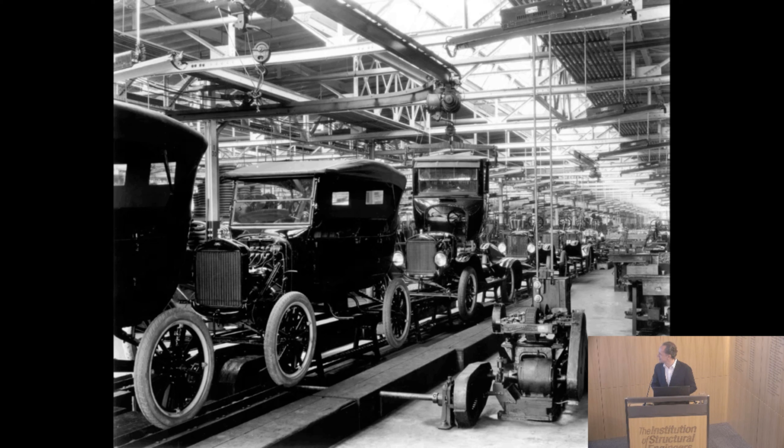So that is lovely if you can do it, but we have a much more tricky challenge, I would say. But at the same time, we shouldn't fall into the trap of saying, let's just do the very basic. We really should be pushing things.

So a quote from one of my favorite authors. I wanted to talk about how we use technology and the fact that the future is maybe already here, just not evenly distributed.

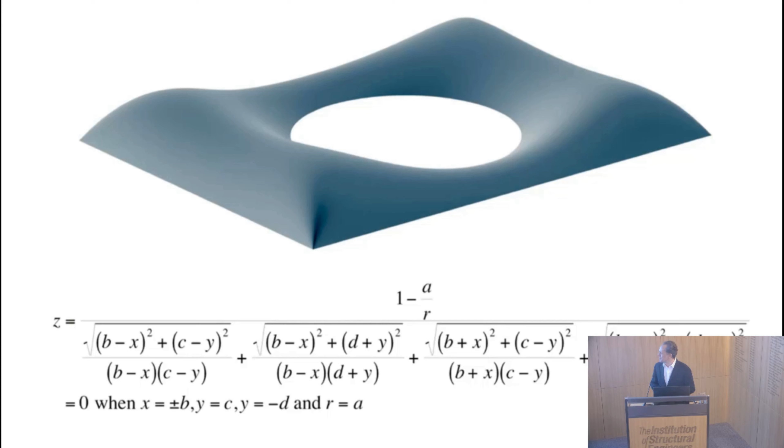Work on computation at Foster's precedes me. This is amazing work done by our colleagues at Buro Happold and at Bath University. Some very elegant integration of geometry and structural optimization and buildability. So these tools have been around for a very long time, although they've been very specialized.

This is one of the first projects I worked on. This is the refurbishment of Dresden Railway Station. This was an interesting example where we were working with Happold. They were doing a great job, but the cycle time was still too long.

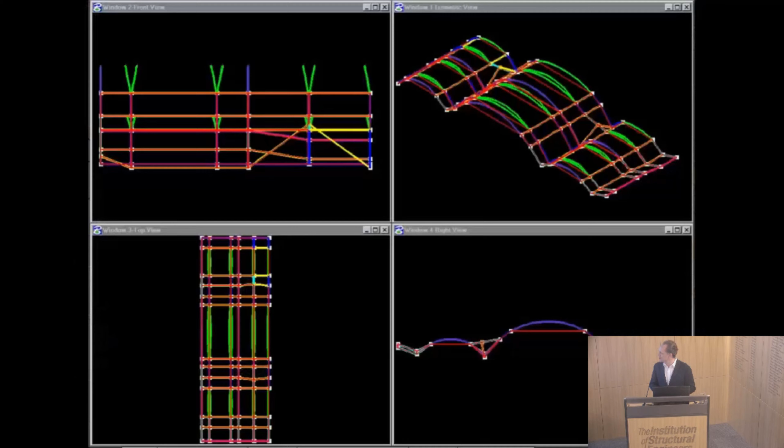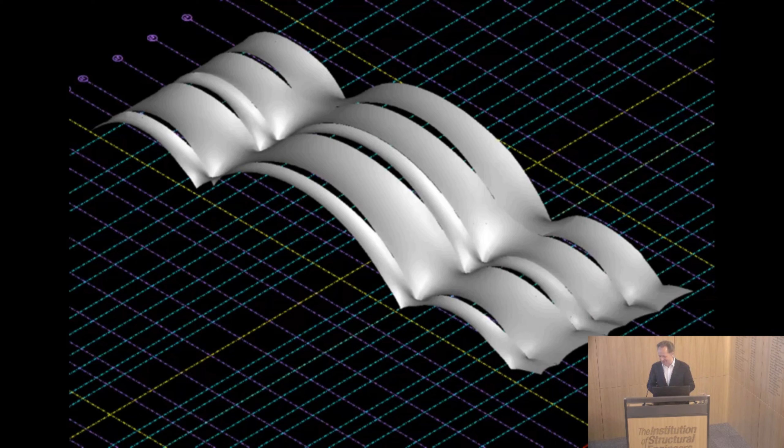So we actually wrote a custom integration between MicroStation and a DOS-based form-finding piece of software called MCM. And we could go round the loop in maybe a half-day cycle rather than a one-week cycle. So, if you never have to reverse engineer a file format, you'll be very fortunate. But it allowed us to do certain things that were very powerful at the time.

With Swiss Re, again, a very odd example of computational design. The tools we were using were Excel. What we were producing was very crude, but it allowed us to do things that at the time were very hard to do.

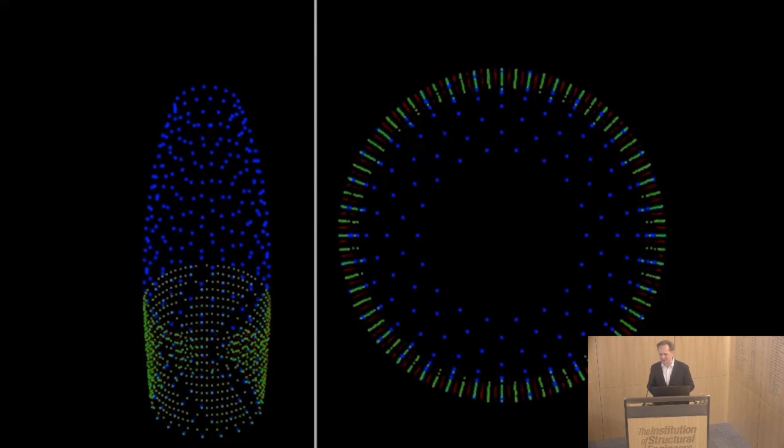Integration time was very limited. You couldn't even exchange data properly between MicroStation and AutoCAD, which is why we had this very simple geometric definition. But it allowed us to essentially mass customize and create a building that I think still stands the test of time.

This is Chesa Futura. This is a wooden chalet we did in Switzerland about 15 years ago now. Again, a very challenging site. You could only build on the site half the year because otherwise it was snowbound.

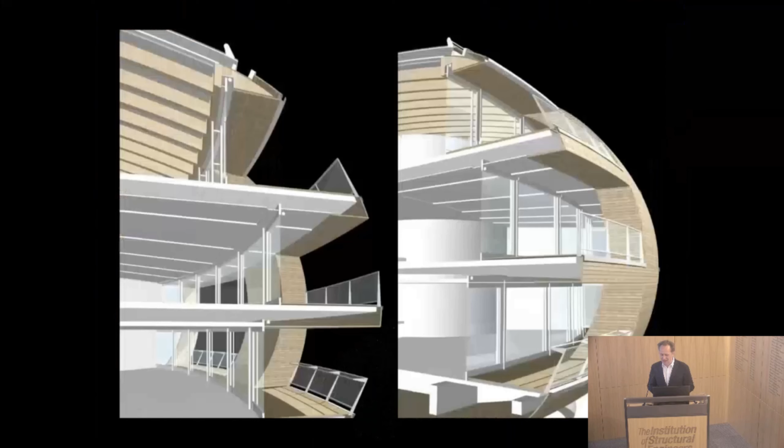Everything is custom. So again, a complete digital model, pretty much entirely made in the factory, brought to site, installed. Off-site manufacturing, it's not a novel thing. It allowed us to do things that we couldn't otherwise have done.

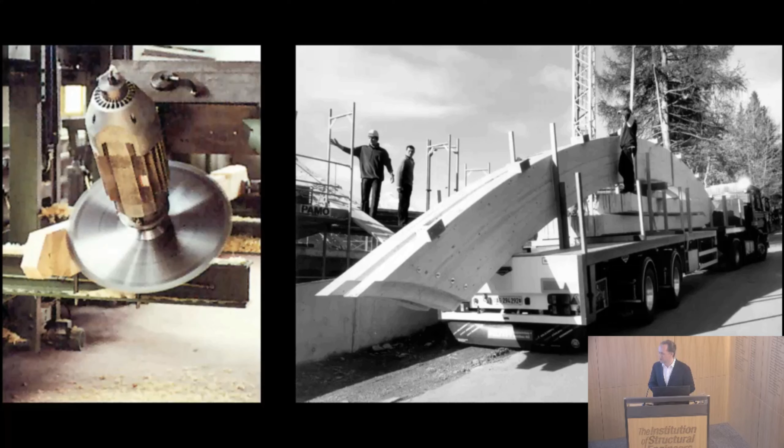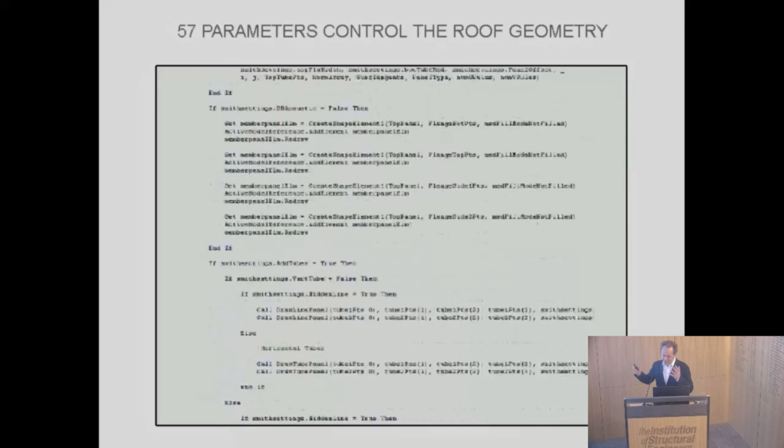These 8 columns, no load could be put on the existing building. For cost reasons, we couldn't have triangulated glass, so the whole thing had to be much more rationalized, with a much smaller budget. Our strategy was, rather than having a massive team try to do this, have a very small team of architects working with programmers, myself included, and generate the entire roof with one program. This is 5,000 lines of code, 57 parameters, generating a huge number, I think 250 options in the end, and lots of geometry.

More critically, this allowed us to work very closely with our structural engineers, Happold's in this case. Rather than having a laborious process of exporting a CAD file then reading it in, we were exchanging very lightweight representations, and they could very quickly analyze it, getting that cycle time down to a day or so.

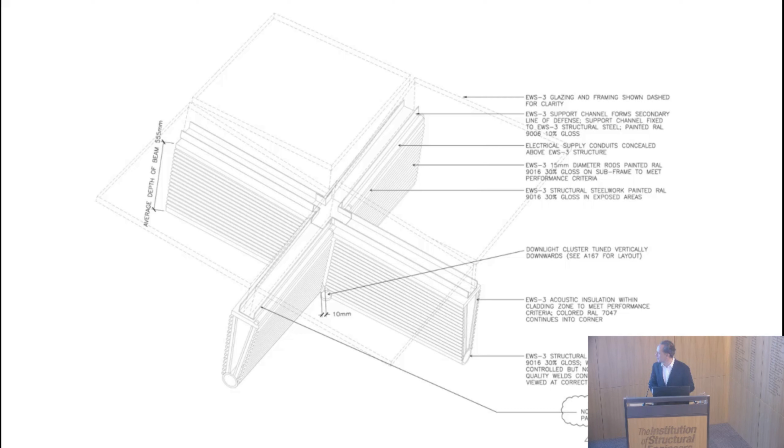I think also what was critical is the level of detail we could go to. We could generate down to a very high level of detail all the geometry of the building, directly send that to fabrication, with lots of off-site assembly of components, and create something which was at the time pretty complex.

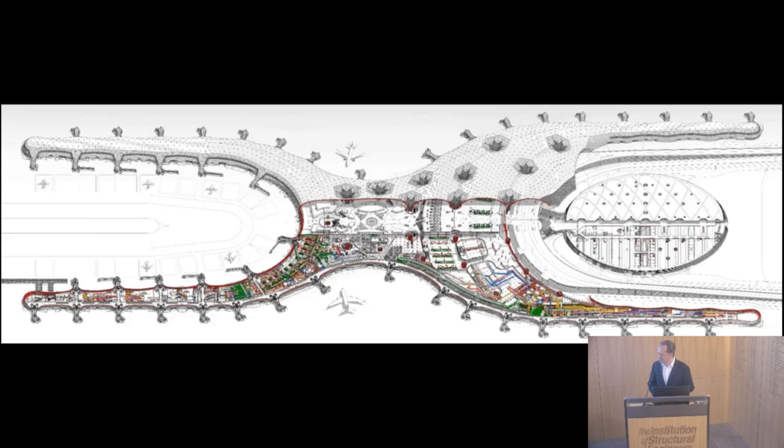At a very low cost and with a much higher degree of certainty. More recently we've been scaling things up. This is Mexico City Airport. Hopefully we'll return to it at some point. This is a very good example of the combination of computational design, computational BIM, a very high level of detail down to all the services, the structure, a completely integrated structural system. This gigantic space frame with 160-meter clear spans.

To try and do this without computation would be extremely hard, and it was probably one of the most challenging projects we've worked on in the office. So these tools have allowed us to do things that we couldn't have done otherwise. Some of them have been extremely crude, but one should not underestimate their power.

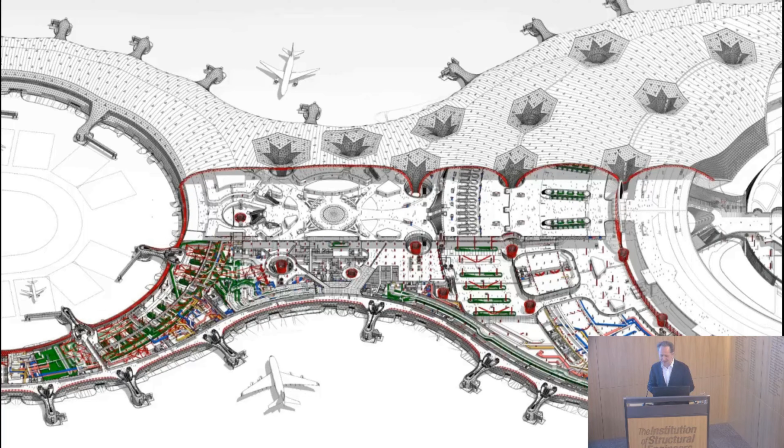It's also key to say it's about people as well. These tools are not magically going to solve your problems. You need a room of people. You need your architects, your structural engineers, your environmental engineers, your project managers, your clients. Everybody needs to be integrated as well.

So, one equation: force is mass times acceleration. It's all very well being incredibly fast, accelerating ahead of the curve. If you have not got the mass behind it, your effective force is going to be quite low. So one of the challenges we've had is, how do we go from an environment like this? This is our office 30 years ago, with I think you can see about 6 computers and lots of paper, through this, just when I started.

And some of you, I'm sure, remember this, a very hybrid workspace. We're now at this level, so a lot less paper, a lot more physical, a lot more screens, a lot more physical models. Interestingly, the question is, what comes next?

What is it going to be? A screen in 5 years' time? What will it mean to have a window? What will the office environment be like? How will we work?

I think the interesting news is we are a large organisation. A lot of people coming out of university have some good digital skills already, but it's how do you correctly harness them? How do you make people aware of what can be done? And also, how can we improve the technology? The technology has improved a lot in the last 20 years. It still has a long way to go.

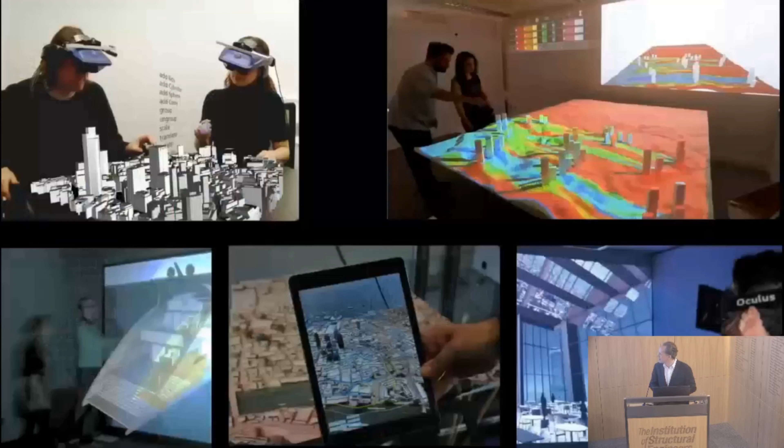So I want to talk about a couple of things that we've been working on internally for a while that maybe help advance. One of the biggest challenges, I think, is that technology can be very unfriendly. There's still, in some cases, quite a hard boundary between people and technology. And we've done a lot of work over the last 20 years trying to break that down, particularly on the interface side.

So these are some examples of tools we've written that hopefully are more intuitive. On the top left is a very early augmented reality multi-user design system, so one can have the sort of natural conversations that one's always used to, but actually edit a digital model floating in front of you. A cruder implementation, perhaps, to the top right, this is a physical model which we are scanning in real time, analyzing in real time, and projecting the results back onto it. Again, it seems to allow people to engage with the process much better.

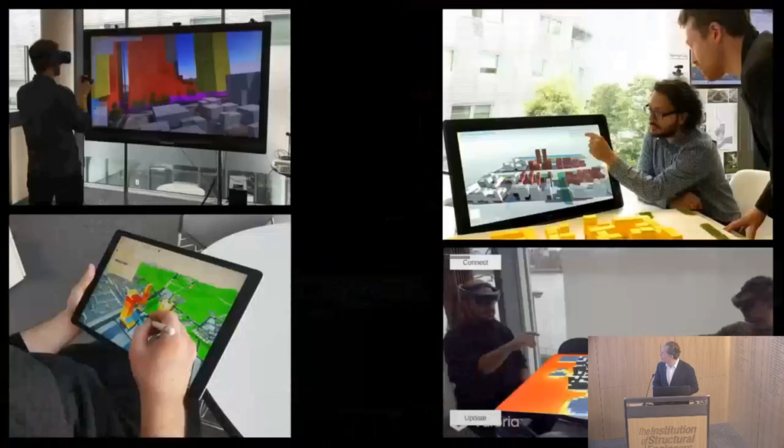Lots of work on virtual reality. Our current implementation of these tools is a piece of software called Sandbox, a cross-platform tool for early-stage conceptual modeling. We support a whole bunch of different interfaces: touchscreens, virtual reality, augmented reality, iPads. So really trying to make these tools available to people in environments they feel comfortable with. Also key, it is a multi-user system, so you're not just doing it by yourself.

And we are trying to decouple the interface from the analysis. The analysis in the main runs in real time, or near real time, so you're getting that very, very fast feedback. And what we're finding is it is leading to much better conversations, both internally but also with our clients. And we're getting some users at all levels of the organisation, which is quite nice to see.

I also want to talk a bit about trying to break down the barriers between people and software. We also have possibly a bigger problem of barriers between bits of software, for all the wonderful statements about IFCs.

This is a bit of software we've written called Hermes, which allows us to link different bits of software together dynamically. In this case, we've got a scenario with a very simplified client-facing tool in Unity, Dynamo running connected to Revit in the middle, and Rhino and GSA running side by side. What would also be good if it ran is the movie. Let's see if this wants to play.

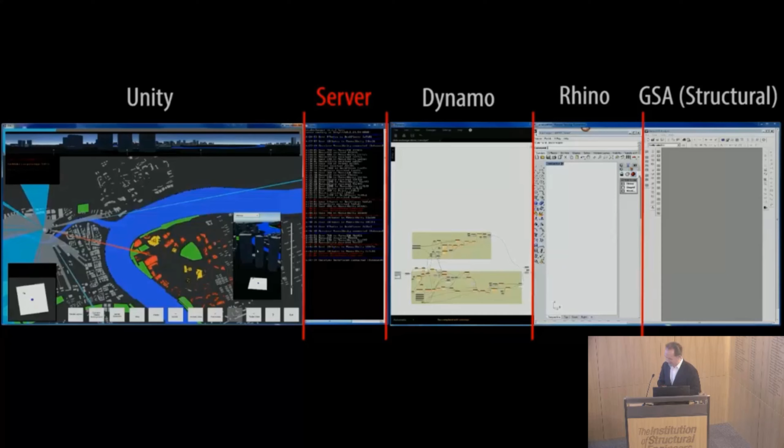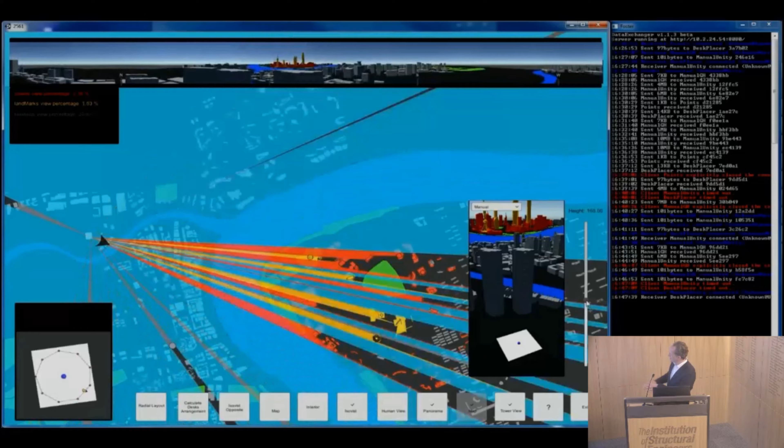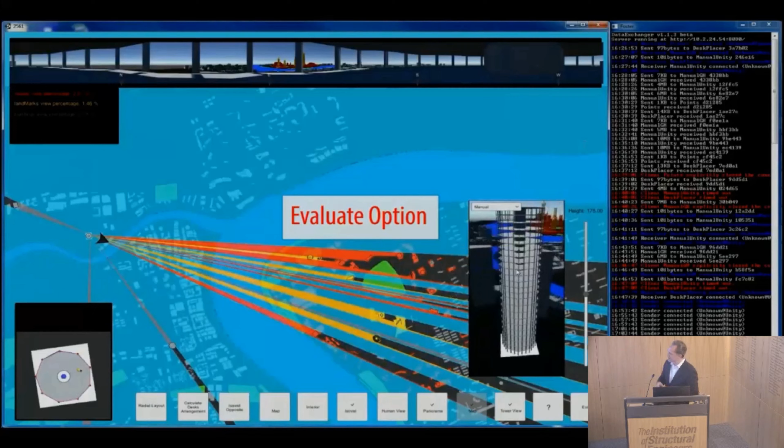So the nice thing is basically we're trying to design a tower here somewhere in China, so we can look at the views at different heights. As we do that, we can basically generate a floor plate in Dynamo, size some columns through GSA, send that back in real time into this client-facing tool, and then evaluate what's the impact of this column sizing on the views at different heights. And then, being architects, they want to change the shape.

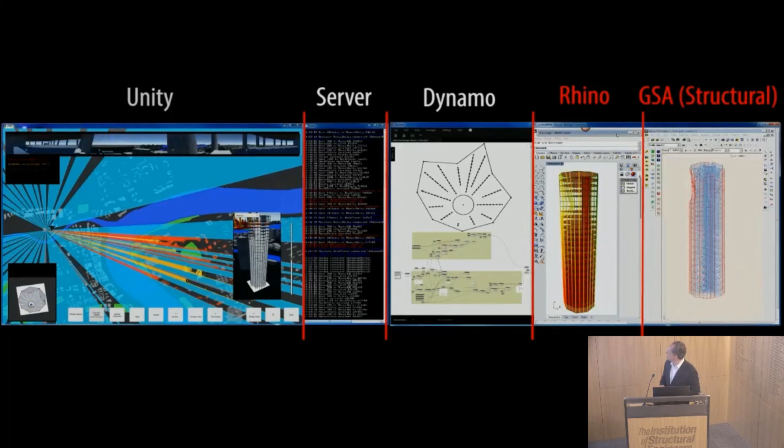Okay, what does that then do to the space planning grid? They throw it, and it comes into GSA. I'm sure all of you are sighing at this point, saying 'what the hell have you done to my structure?' But it's okay, diagrids are a good thing. So we can then send that back over the wire, and then there's the result.

So this is happening in real time or near real time. These packages are not designed to talk together, but we've sort of made them talk. The nice thing is this can work locally on a single machine across multiple machines. We've been using this for some of our consultants as well. So this is really trying to be a sort of universal translator.

This is our implementation of an idea, and there are quite a few other implementations of this idea out there. I think we'll be seeing some more mentions of these. My strong desire is that we try and agree some open standards on this, because everyone's got some very lovely implementations of this idea, and it would be good to push it all together. But the key thing here is you're breaking down silos between bits of software and ideas which should not be in silos.

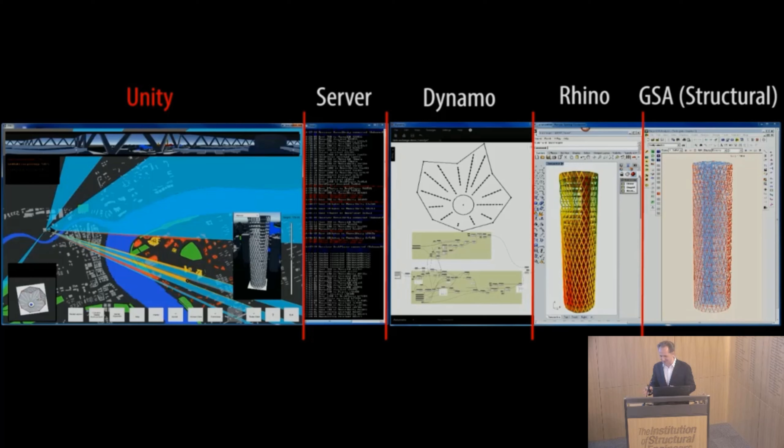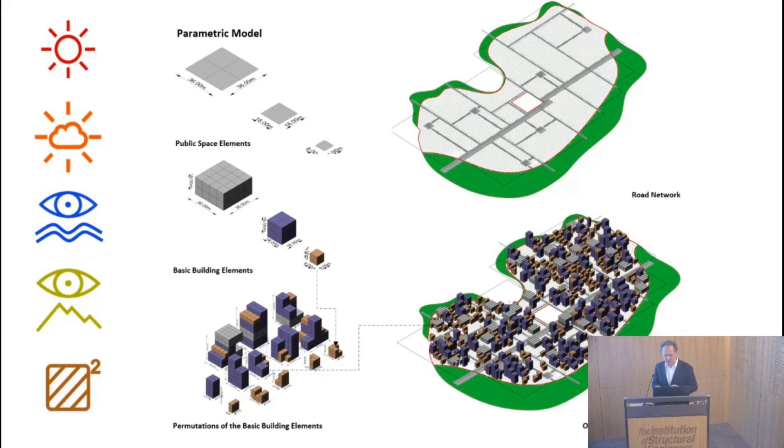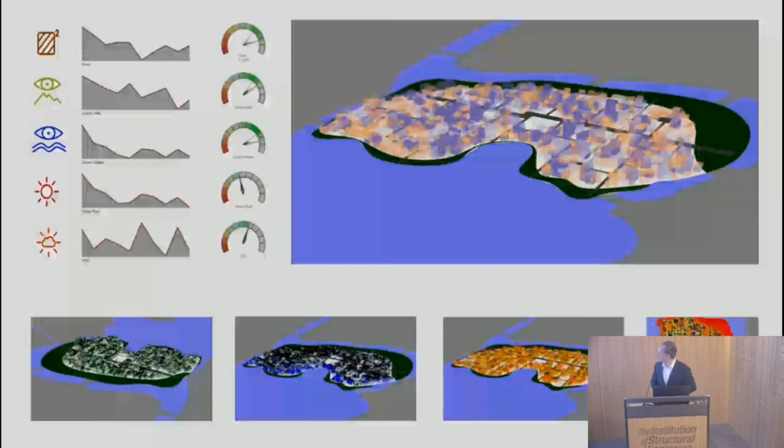We've linked it up to essentially a supercomputing system we've developed in-house, which is using most of our machines to run multiple options, analyze them, crossbreed them, and refine them. So probably testing out hundreds of thousands of options overnight to create a range of possible cities that could work based on these criteria.

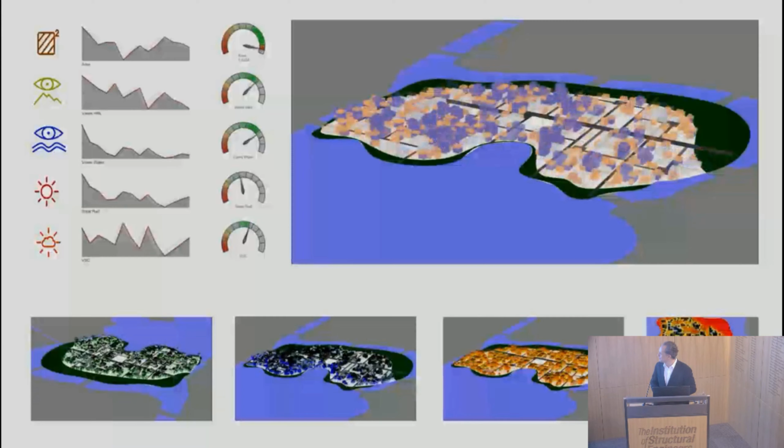We've done similar things at building scale. Here we're looking at views, daylight, and basic structural considerations, I would say. Interestingly, some of the massing options on the right are very good for views, but perhaps less good structurally. But the key thing is you could then converge on a massing, as you can see on the left, which arguably is pretty buildable.

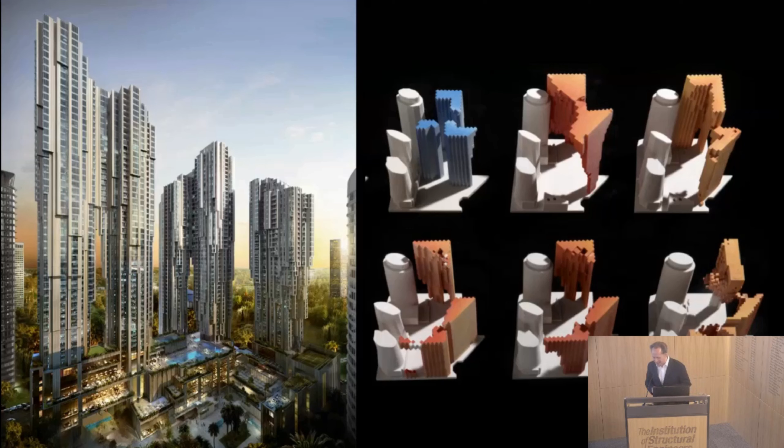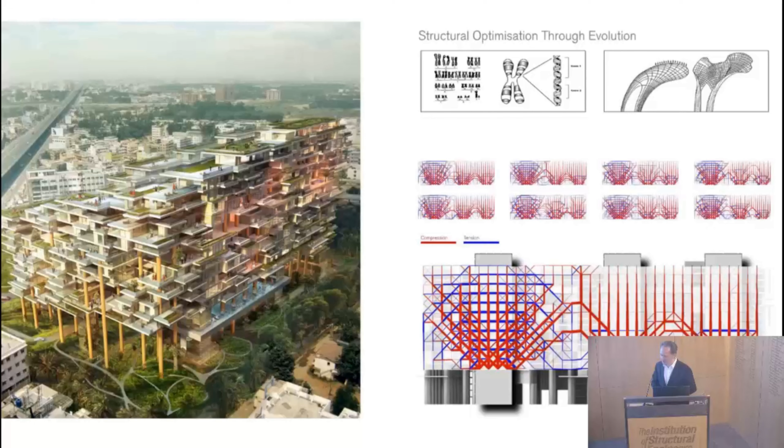And then classic things like sizing columns to minimize material usage. We've also started using this sort of distributed computation system we called Hydra to do some material optimization. So in this case, please let me show you the next movie.

Another key thing which we as an industry should do a lot more of is evidence-based design—actually checking what we've built correlates with what we've simulated. The good news is that sensors are becoming much cheaper and our ability to process that data is becoming much better. This is a noise monitoring system we put together using very low-cost kit, a Raspberry Pi and a microphone.

Here we're monitoring noise across London with very low-cost devices, correlating with aircraft. Five or ten years ago this would have been a very expensive thing to do. Now we can do it at say £100 per unit. Sensors are getting radically cheaper. There should be no excuse not to fully instrument one's buildings the same way aircraft designers or car designers do, and use all that data to inform ourselves.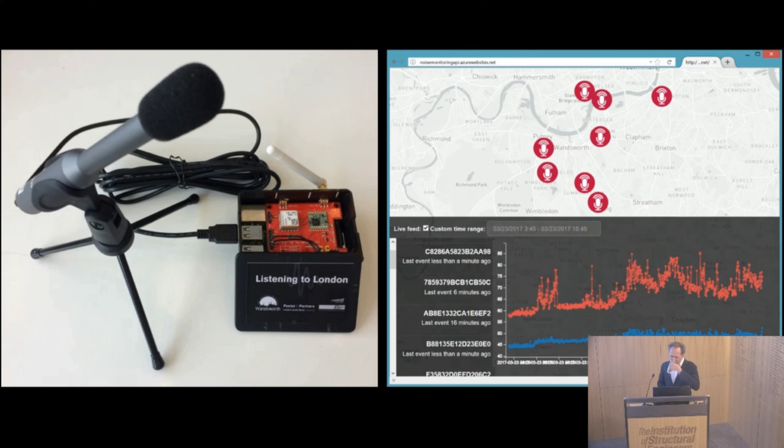So it all sounds wonderful, but there is a risk of this. Any sufficiently advanced technology is indistinguishable from magic, so a lot of people might assume technology is a magic panacea that'll solve all your problems. For the record, I like pasta a lot, but there is a thing as too much spaghetti.

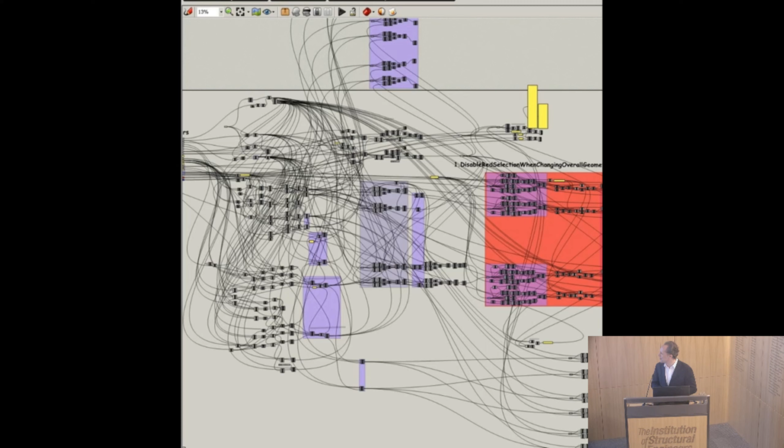I'm sure some of you have probably seen this sort of thing. Some of these tools are wonderful, but they need to be used very carefully. They need to be directed well. The same goes for analysis—it is very easy to be seduced by colors for designers, or CFD as it's sometimes known.

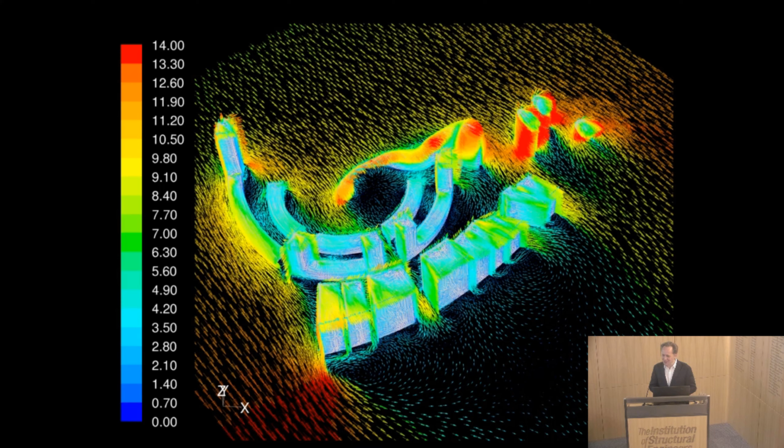In terms of training the next generation, critical thinking is pretty damn critical. And if you think it's bad with just simulation, wait till we get to AI. A lot of these systems are black boxes—we don't really know what's going on inside them. That concerns me, to be frank. I think we need to be even more critical of how they are functioning and how we can prove their results.

So those are one sort of challenges. I'd like to suggest perhaps we also have two bigger challenges facing the industry. One is that buildings have always helped fulfill Maslow's needs hierarchy. At the very basic level they provide shelter, ventilation, safety. Over time they have become bigger than that—they become spaces to inspire, ways to create experience.

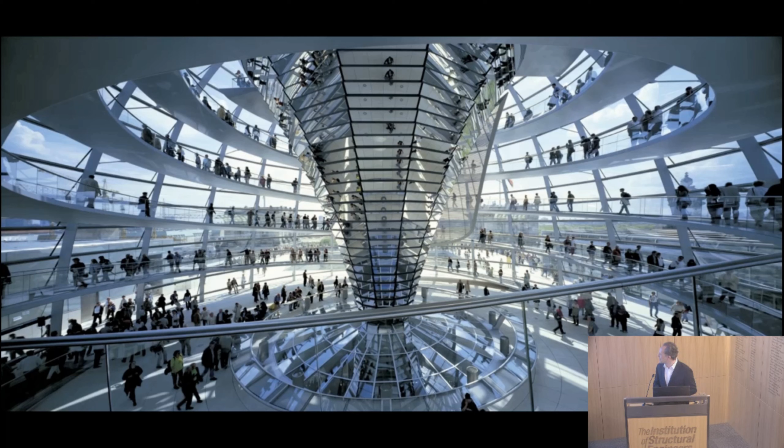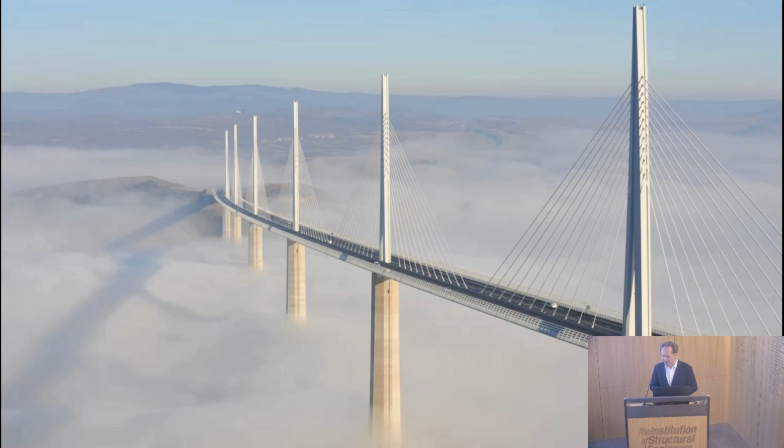So that is a very large responsibility to create that sort of experience. Historically, only a building could create that sort of experience at that sort of scale, but that is beginning to change. I've been involved in virtual reality research for more than 20 years. I'm usually pretty good at telling what is real and what is virtual—until a few years ago, I tried this.

This is a VR experience where you walk on a tightrope between the old Twin Towers in New York. Someone actually did this for real when the World Trade Center first opened in the 70s. So you think, okay, fair enough, I'm in a conference center somewhere in California, I've got to walk maybe the length of this room. I have my headset on, it's fine. I have headphones on with some wind noise, a fan blowing on me, and on the floor a plastic strip. Fine, it's all good—I've been doing VR for 20 years, nothing to fear here.

So I walk up to the edge of the tower. I cannot do it. And I'm like, Francis, okay, you're in a convention center in California, yeah, this is a simulation. This isn't me, but this is pretty similar to what I was feeling. I was told about 90% of people couldn't actually do this, which is quite scary—and these are computer graphics professionals. So if it can trigger an automatic response in me, it could probably do it in most other people.

It gets weirder. A short while later, I happened to be sitting on a boat off the coast of California, beautiful sunset, but I was thinking this doesn't quite feel right—the water's a bit too glassy and the sunset's a bit too glossy. It's like the virtual has become real and the real has become virtual, and that's quite a scary thing.

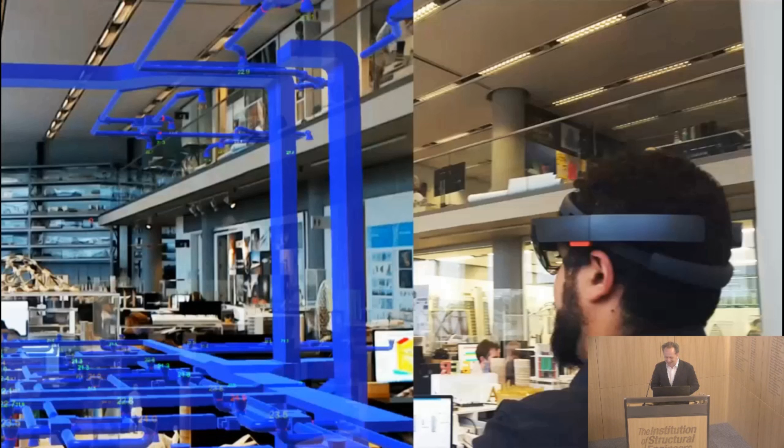So maybe one might say, paraphrasing Le Corbusier, a holodeck is a machine for living in. It gets even more interesting if you consider augmented reality. Already this is proving to be an interesting tool to combine the real and the virtual. This is an example looking at seeing through walls, at structure or services—in our office.

It gets also interesting in terms of collaboration. This is a testing we were doing. I'm standing in one of our meeting rooms. My colleague here is virtually joining me from another part of our campus. We're both looking at this shared model. We're in an environment we know, but I'm interacting with somebody who is not physically there in a very intuitive fashion. Now, that is nice for us, but consider the impact on lots of other ways of doing business.

Actually, do I need to fly halfway around the world for a 2-hour meeting? If I can get now, what is the implication on our buildings, on our transport systems, if you could do this effectively?

And also, it's not just about headsets. So, again, yours truly, looking up at this very nice Mediterranean sky, out this skylight. I'm squinting. It's bright. It's a very nice environment. The problem here is I'm actually 2 floors underground, and that is not a real skylight. This is a virtual skylight, but it's triggering the same responses in me as a real one would do.

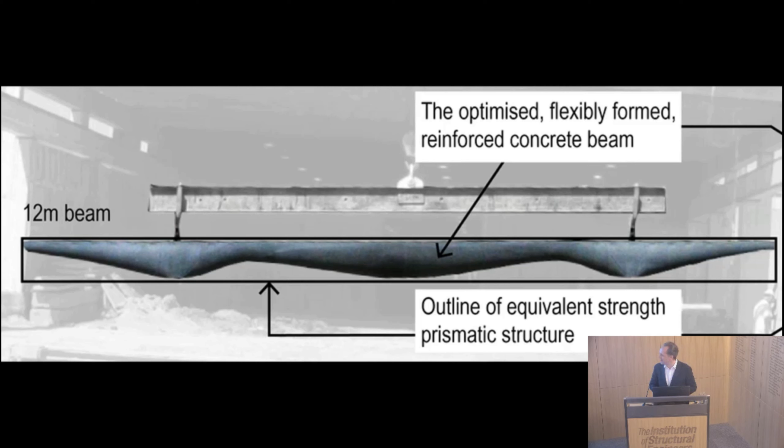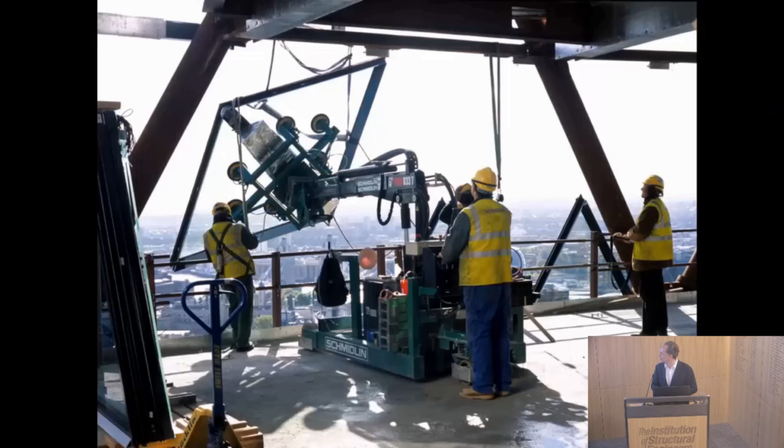So I think the good news is that through computation, one can optimize, one can be much more efficient in one's use of materials. So we've started some work with Cambridge and Bath universities on some optimal kind of creation of concrete. We've been doing work with Cranfield on metal printing. All these technologies, we've been working on some of these things for a very long time. They are getting to production levels of quality, and it will, I think, radically change what we can build and how efficiently we can build it. I think robotic assembly—this is not a fully automatic robot, this is Swiss Re going up—but robotic assembly as well could really improve the way we can build things.

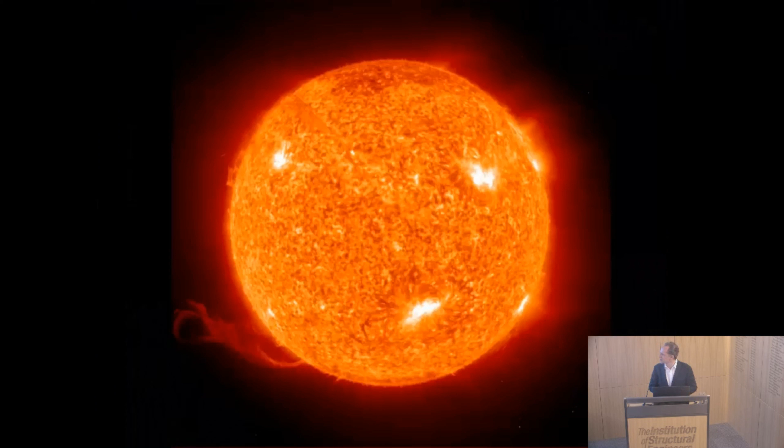We should also remember that we actually have, in a way, unlimited energy. The sun creates a huge amount of energy. We do not use 1/100th of what actually lands on the Earth's surface. So actually, that is free. We should use more of that.

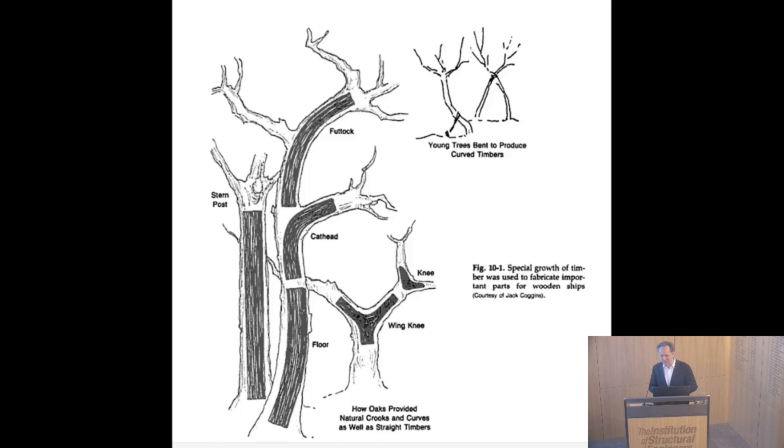And I also think we should tap into nature. Hundreds of years ago, people were growing trees and forcing them to grow in certain shapes to create the ribs for ships. That took 40 years to grow a ship. Nature builds some pretty impressive structures. I think there are some things we could do to work with nature. So perhaps in the future, a building will be a self-assembling robot for living in.

So I've given some ideas there. I think we really need to integrate more. There's a lot of challenges to face. We need to be working in a much more integrated fashion. I think we need to differentiate more. We need to differentiate from other industries to say, actually, this is why we are adding value. This is how we're going to meet the needs of our society and of our planet. So thank you very much.